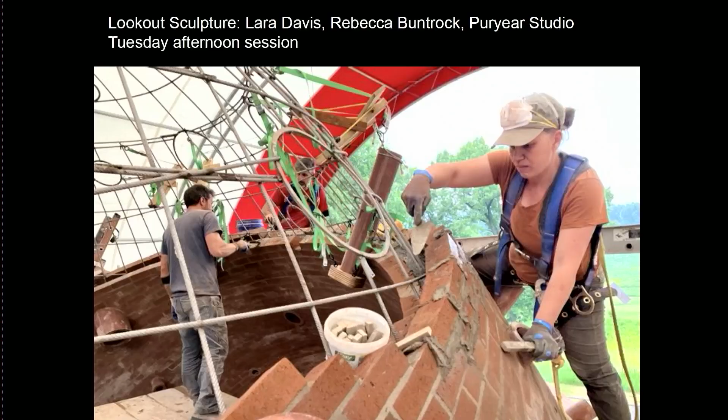And we've also done a few other things. We just recently built a sculpture with free-spanning brick around a guiding cage in the Hudson Valley at Storm King. Lara Davis will present that on Tuesday afternoon, so I won't say much more about it, but it was a really cool project, and we learned a lot from it.

And David Billington could never give a talk without showing Salginatobel Bridge. He was my professor, and Salginatobel is always there. My Salginatobel is, of course, this staircase by Guastavino, doubly curved, no steel. The builder, Rafael Guastavino Jr., dropped out of formal education at age 10.

The nerve of this guy to build this with no computer model, no nonlinear analysis, no dynamic analysis, and then to add insult to injury, this is in the civil engineering department at Carnegie Mellon. So you have generations of students going up and down the staircase without the foggiest idea how to calculate that it works, and it has no steel. This is 1914. Now, since we were together at MIT, I realized this staircase was proposed in 1914.

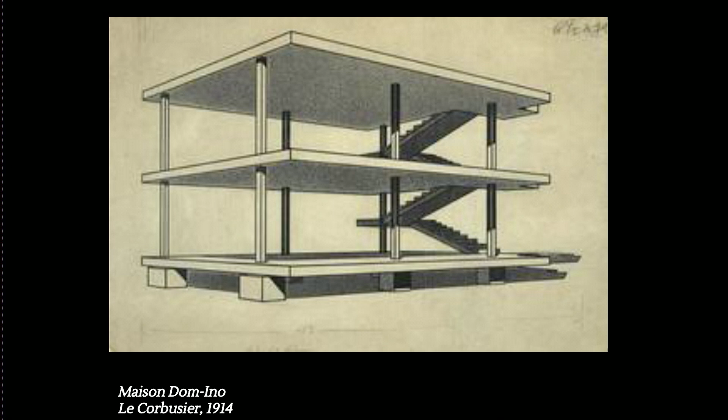The difference, this one was actually built. This one then became the only possible way to build for the next 110 years. And the only possible way to build a staircase is this. So I ask you, is this the pinnacle of all time? And 100 years from now, is this what the building code should say is the only way to build a staircase?

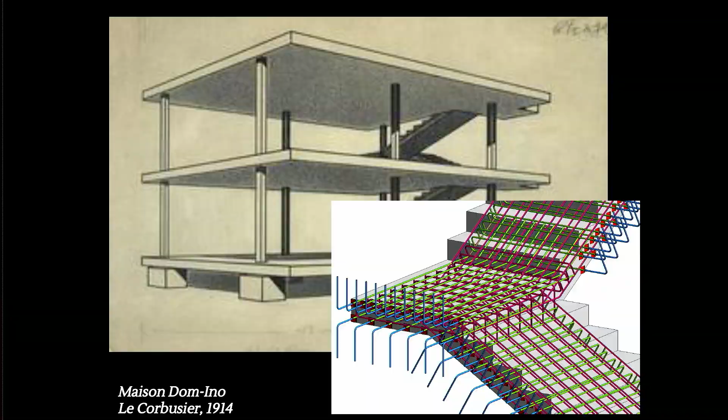And this recognition that we are following a culture, our building codes have culture, our system has ingrained ways of doing things, and we're at a time in the world where there's so many assumptions that we have to question when we look at the climate crisis, when we look at inequality, when we look at who benefits from our projects.

So I want you to think about what someone with a 5th grade formal education did here, and that was not mentioned in publications. It was not an important structure at the time, but of course, this was an important structure. So let's think about that. So one key message from 6 years ago and still today is beware of progress ideology.

John Ochsendorf remembers my undergraduate thesis with this Inca grass bridge in Peru. We were load testing the cables, and this bridge, I still believe, has more to teach us than the iron bridge at Coalbrookdale, which is always in historic structures. This bridge has been built by the same 4 communities for 700 years, speaking an indigenous language, and every year the bridge grows on the hillside, it falls into the river, and it's washed away by the river.

And when they build it, they drink a local beer that's made from the local corn. Find a more sustainable structure than that. 700 years, local beer, local grass. I know what you're all thinking, it's some really good grass.

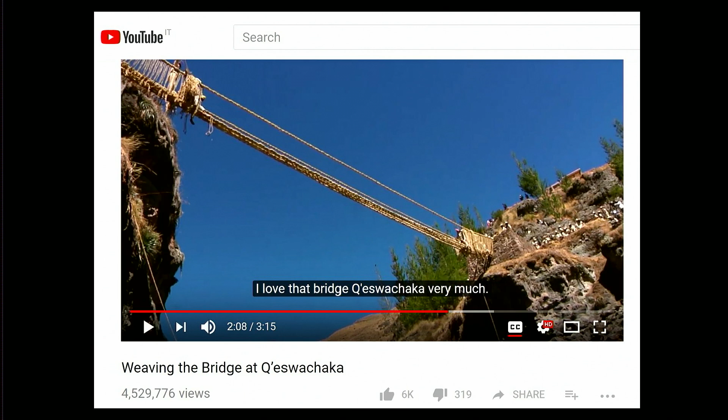So, for those of you who were with me in Kresge Auditorium 6 years ago, these were the 4 key conclusions: that we should study history. It's fertile ground for designers. If you're in music or literature or art or architecture, we're constantly learning from history. Structural engineering, structural design is not studying enough of our history.

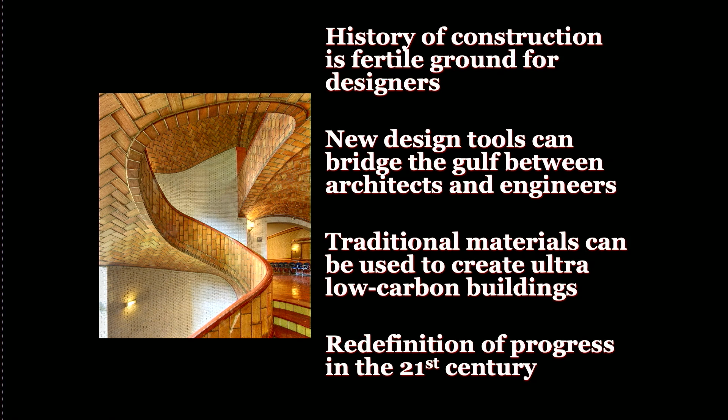We have new design tools that can help us bridge the gap, help design teams explore, and we need to really think about traditional materials to create ultra-low carbon buildings and perhaps redefine progress in the 21st century and not base it on that 1914 staircase filled with steel as the only possible way to build a staircase.

So the Swiss tradition of structural design is alive and well. It's known around the world, so it's especially nice to be here in Zurich. And boy, there are a lot of cool structures to look at. So things are looking up here. But many of us were influenced by Billington's work on the Swiss legacy in an art exhibition that highlighted the work of Heinz Isler, of course, as the great shell builder, but also Maillart, Menn, and Othmar Ammann.

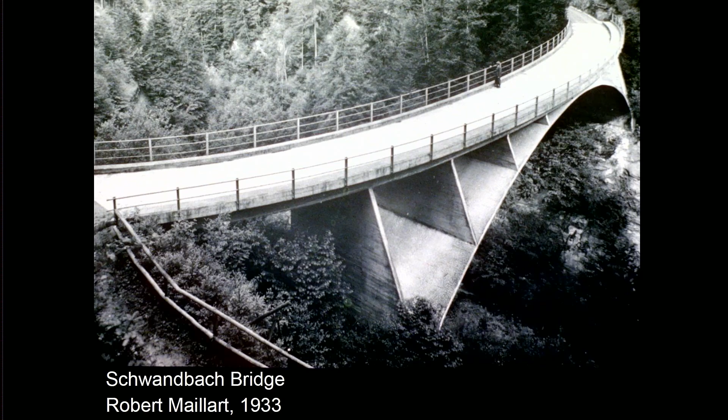And Maillart, of course, is super well known as this great disciplined and playful designer. Here he is allowing the ash to go as far as possible without falling off. So he's got to hold very, very still. So it's a playful moment, but it's also quite disciplined, what you need to be a designer. And of course, some of you and the students in the audience especially know Salginatobel. You may know the Schwandbach Bridge with this incredibly curved, thin deck, well known around the world.

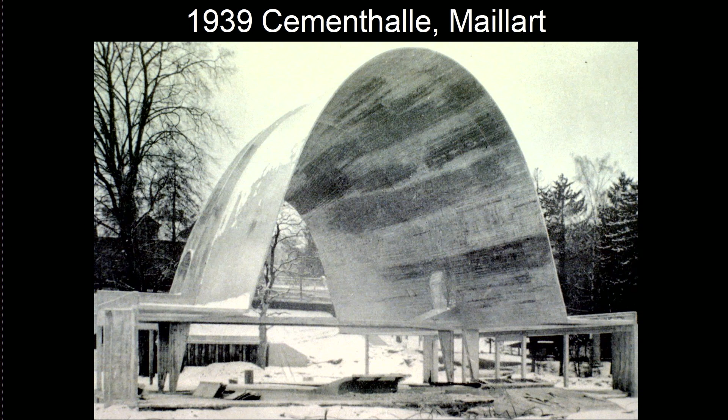I can't help but also add on the 85th anniversary, the 1939 cement hall of a mature Maillart, to give you an idea of how far ahead he was in thinking about surfaces and what was possible in shells. This is built in Zurich as a pavilion. The shell is 6 centimeters thick, not very much published at the time, kind of unremarkable in the press. And look at the cleverness of the formwork. It was gunnited onto the shell.

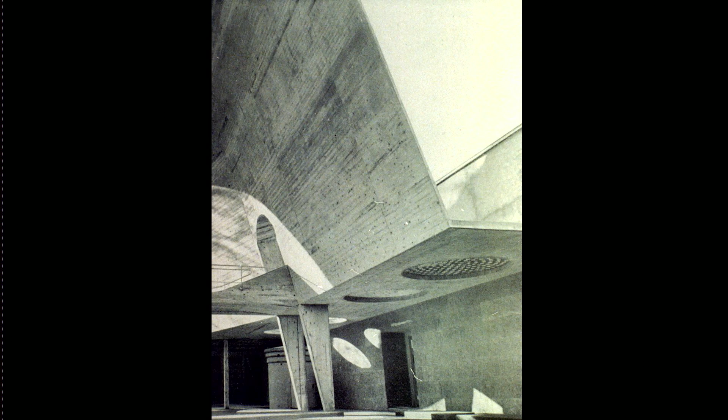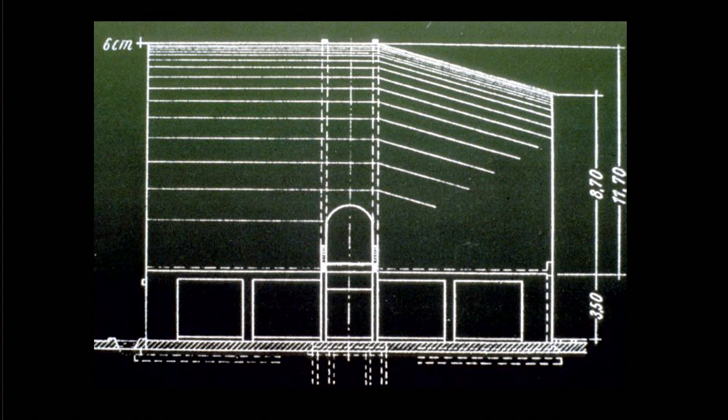And also look at all of the elements that are integrated here. You have shaping according to where you need greater bending. You have lightening of the slab and allowing in natural light. And just a radical, radical way of combining different elements. So if someone were presenting this project at this year's IASS, we would say, wow, that's a pretty impressive shell. Oh, and he calculated this on about 1 sheet of paper. So this is what it looks like in section, with adding some parabolas, of course, but then changing curvature a bit to stiffen it.

And the way he conceived of it was essentially as a deep beam inclined. Calculate that very easily on one sheet of paper. It's supporting a series of arches and then cantilevers coming off of that. So radical structure in a synthetic way by a brilliant designer at the end of his life. This gives you a better sense of the geometry.

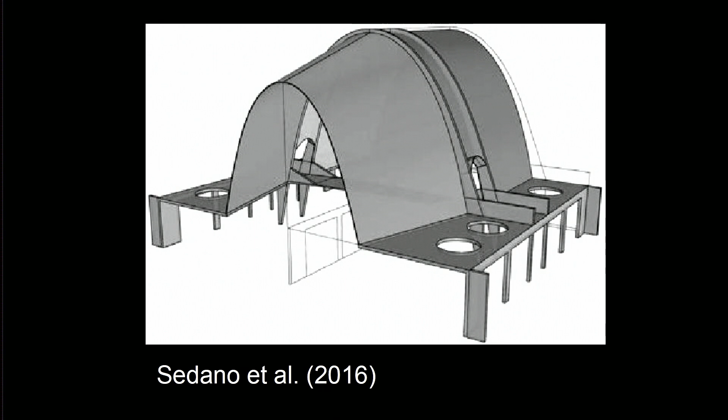So I pay homage to this shell here in Zurich because it was so important for our field. And here he is in the center as they're trying to bring down the temporary shell with dynamite. Of course, you all know what happens. They put the dynamite, they blast it, and the shell stands. And they do it again and it stands. So they eventually have to pull it with a bulldozer to bring down the shell. Incredible strength through geometry, 6 centimeters thick.

And here he is, just a year or two before he dies, picking through the rubble, studying, being a student until the end, and thinking about what he can learn from this integrated design. And he's absolutely projecting into the future what could be done with shells. But again, wasn't paid much attention to at the time.

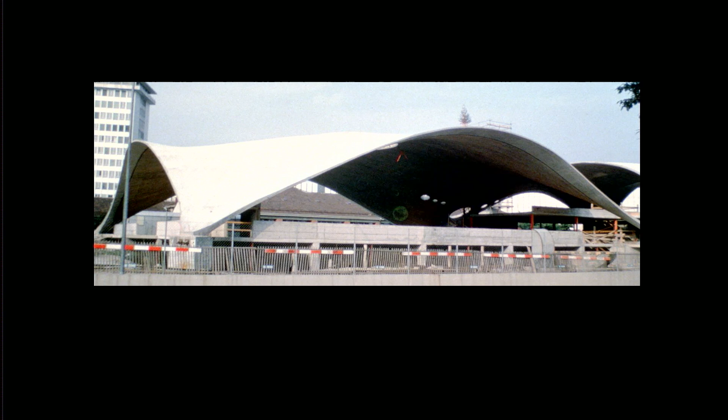Of course, Isler goes on to do remarkable things with hanging geometries that are compression only. If you have a chance to go and see the Sicli building in Geneva, it has the Candela exhibition now, which is super exciting. So I hope some of you are able to go and see that. And this is an image from Billington, which shows Isler standing on Sicli and pointing to the unlimited future of shells.

We're all on the same page?

Good. But I also have to pay homage here at ETH to something that inspired so many of us, and that is form finding and exploration of geometry through graphic statics. And we're delighted to see all of the renaissance of graphic statics happening around the world, and a lot of it being led here at ETH as well. But we pay homage to these professors, and this important work you can constantly continue to learn from.

But I also want to highlight Maurice Koechlin, one of the students. We've recently been digging into some of his work, and of course, many of you know that this is Koechlin's original drawing of a tower or a pylon that would have no force in the diagonals. So there's a very subtle message here, which is that the Eiffel Tower is actually Swiss.

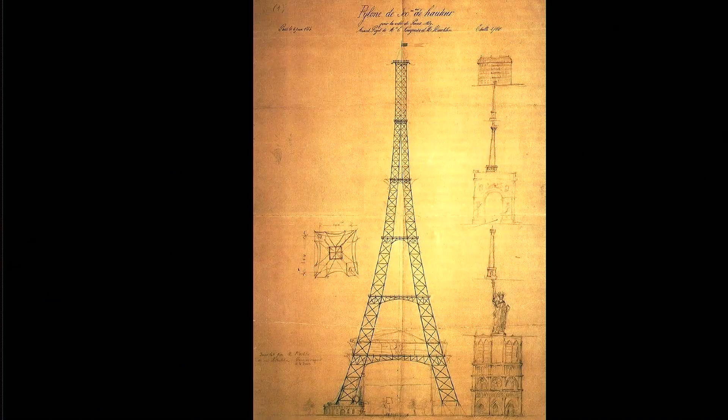And with all due respect to our French colleagues, the other key thing, of course, we've recently been digging into archives and the design process of one of the greatest bridges, the Garabit Viaduct, which Maurice Koechlin also designed using graphic statics that he learned here at ETH. And we've got some exciting new results on that we're going to present at next year's IASS.

So I'm not going to go into a lot of detail, but I do have a very serious message for all the students, which is you must go and visit great structures and learn from them. Study them, climb on them. You can learn so much from visiting built buildings.

Don't you think, Philippe? 20 years ago this summer, we made a pilgrimage to Garabit Viaduct. We're still learning from it. That was back when I had so much hair.

And so here in Zurich, I pay homage to the Swiss legacy that Billington writes about in The Tower and the Bridge. We could quibble with some things in it, but a lot of it still holds and holds well. And for those of you who didn't have a chance to hear Billington lecture, he always spoke about the 3 E's of structural design, in particular efficiency, economy, and elegance.

And the idea is just so simple. We obviously must build efficient structures from a material standpoint, but they must be economical to build, or else they're wasting those natural resources. And ultimately, as Maillart said, we are seeking to avoid ugliness. So within those constraints of efficiency and economy, we're trying to find elegant solutions.

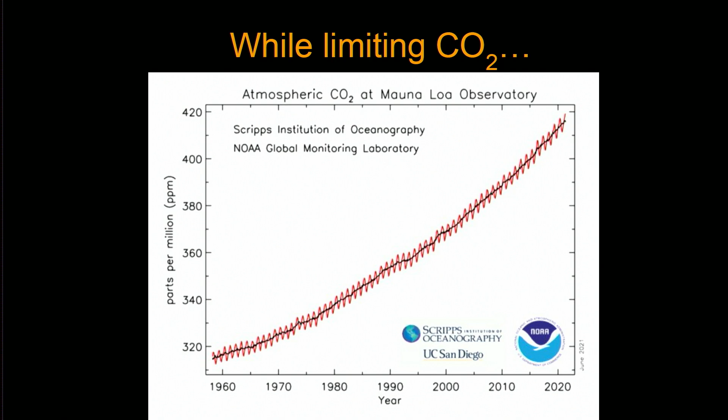We need IASS. We need new ideas. They need to work with all those constraints of economy and efficiency, but they also have to really think carefully about context and environment. And in particular, with all due respect to Switzerland and Canada and the UK, wealthy countries with lots of water are probably going to be okay. Most of the floor area that's being built is in Africa, India, Latin America. If you look at existing floor area and what is projected to be built, most of it is going to be built not necessarily in Switzerland or Canada.

And if we ask ourselves, how can we most easily avoid a ton of carbon emissions, we may have better opportunities collaborating with colleagues all around the world. And so it's so great that IASS is so global, but I'd like to really shine a light on where the needs are to not import steel and cement and build inefficient structures. And then if we can win in the marketplace, we can have a really big impact here.

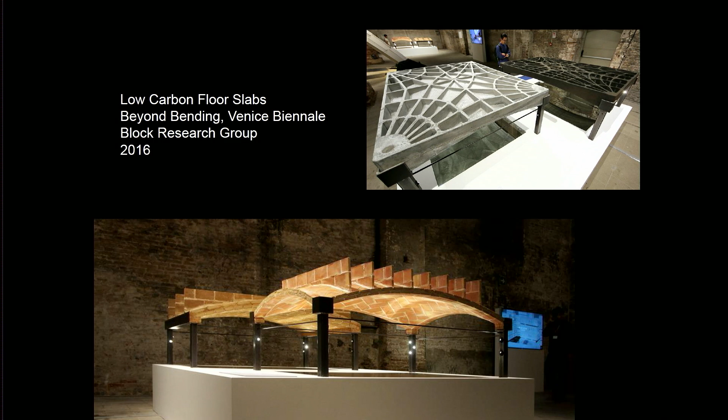And of course, some of our work on low carbon floor slabs, these 2 digitally fabricated here from BRG, and my rather ancient methods of Guastavino tile construction, an Islamic construction method from more than 1,000 years ago, unreinforced shells, doubly curved floor systems. We were saying this 8 years ago that this is important, and I want to highlight another paper we'll have tomorrow. Nebu is presenting on some low-carbon vaulted floors, and we'll be building a prototype in Ethiopia next year.

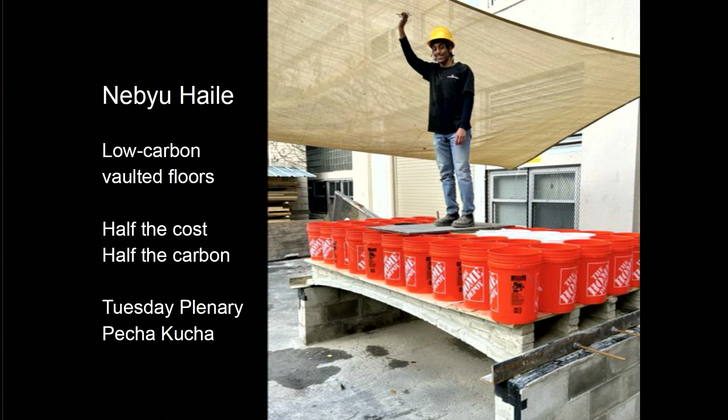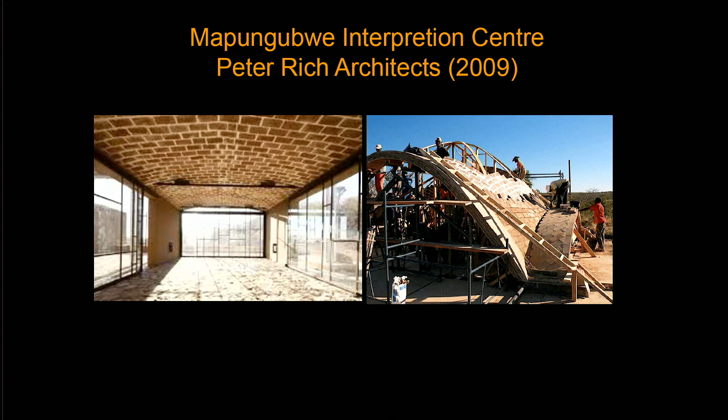And these are about half the cost and half the carbon of existing concrete slabs in low-cost housing in Ethiopia. So we're working with builders to see, can we create projects that are going to win in the marketplace, and then the low carbon just becomes a bonus. And of course, the Mapungubwe project, this is lost formwork for a concrete slab on the left, but we think there are constantly things we can learn. So we're still on the same bandwagon 15 years later. Unreinforced shells with low strength, these are about 1 megapascal shells that have the potential to build low-cost structures.

I also want to remind everyone, for those of you who were here in Venice in 2007, I distinctly remember the great structural designer Jörg Schlaich got extremely upset about this structure at an IASS conference. Does anyone else remember that? You remember, good. I'm not the only person here who remembers that. He was really upset about the lack of efficiency, the wastage of materials, and that had a big influence on me as a young professor. And so that was one of the ideas I said to Catherine maybe more than a decade ago, and then I got out of her way. And so I again pay homage to Schlaich and him demanding a higher moral and ethical responsibility from design teams with this colossal structure as an example, not to be followed.

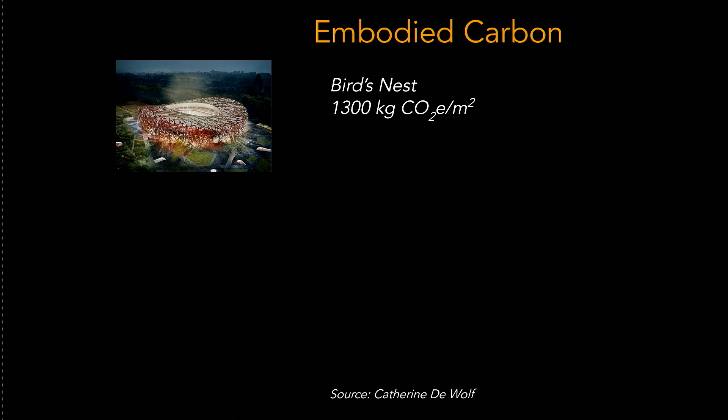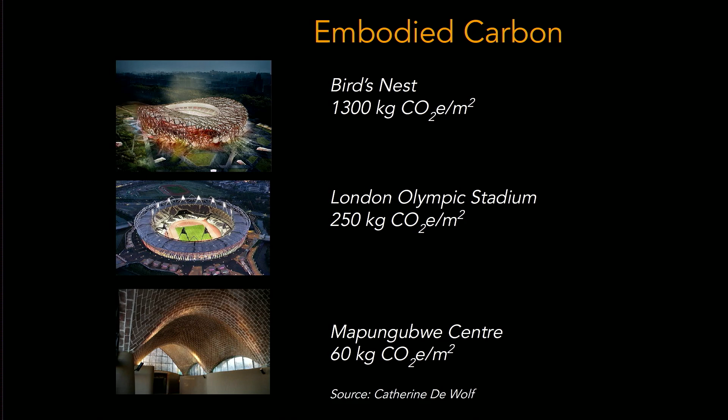So Catherine quantified over a ton of CO2 per square meter. The London Olympic Stadium, 4 years later, is 1/5 of that per square meter. So you can build about 5 London Olympic stadiums for 1 Bird's Nest. And then the Mapungubwe is a factor of 4 again below. So with local materials, unreinforced, you can go dramatically lower carbon. And so this was work we published about a decade ago.

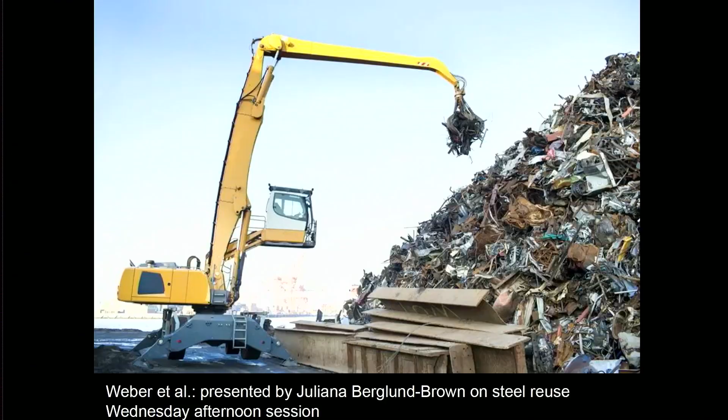But this also raises a question about the lifetime of our structures and really thinking about many of our structures almost like disposable food containers that have short lifetimes, and we need to really think about minimizing them. And if you look at a typical metal scrap heap, you might find steel beams like this at the edge that are holding the mountain of steel scrap in place.

Well, I have a crazy idea. Actually, Juliana and many of you here have this idea, not just me, that these steel beams could do more than just retain that scrap. We could use them in new projects. And we need to change our supply chain to acknowledge that when buildings come down, we should mine those resources and use them in new projects. And I know a lot of you are here working on those topics, but for me, that's super exciting. And we'll present some work that has implications for steel reuse on Wednesday afternoon.

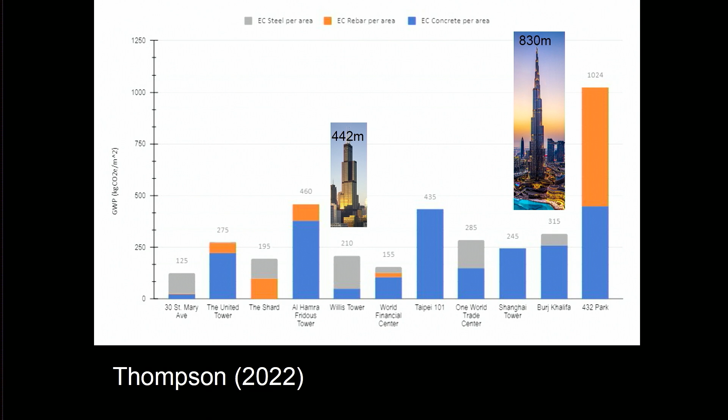Now, here are the material quantities in terms of global warming potential, kilograms of CO2. On the far right is 432 Park, that concrete building. These are other tall buildings around the world. 432 Park is 425 meters tall. The artist formerly known as the Sears Tower, the Willis Tower, is around the same order of magnitude. It's 1/5 the carbon. The Burj Khalifa, 1/3 of the carbon and twice the height. Shocking. Absolutely shocking.

And yet, these projects are built with huge amounts of material because there's a design team who said this is a good idea, or I'm happy to take my paycheck for this project. So I'll add a fifth: ethics. What are we doing as designers? What projects are we working on? All our fancy education, our dynamic analysis, who benefits from our work?

And why? So I know I live in my ivory tower in the university. I seem to be just creating other professors; there are a lot of us. But we have an obligation to talk about this, to talk about ethics. And so I'll ask a few basic questions. Should the project be built at all?

Who benefits from this project being built? And should I personally work on this project? Because I do think we as a community can start to take a stand that there are certain projects, as Schlaich reminded us in 2007 in Venice, that the bird's nest was a disaster. And he would not have worked on that project. Or he would have tried to make it a lot better and then may have walked away.

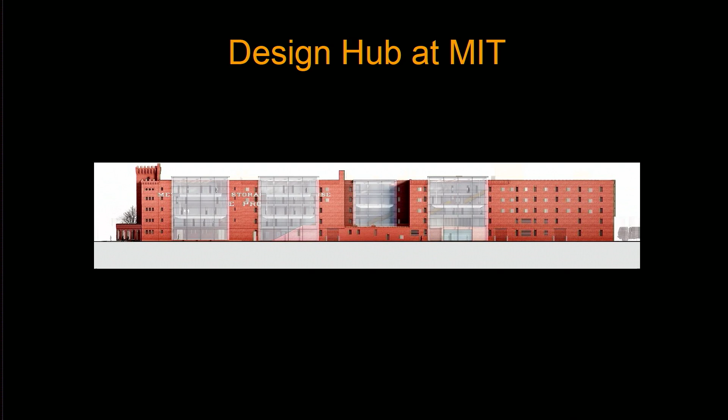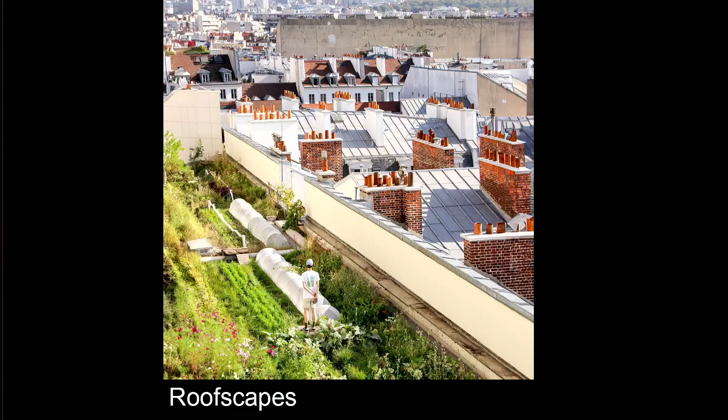And so the main thing I'm working on right now is trying to change undergraduate engineering education at MIT to have much more open-ended design. So we're doing an adaptive reuse of a large brick warehouse. And these are going to be design studios with hands-on making projects, bringing teams together to work on pressing challenges with collaborators from around the world. And our hope is that we're going to be able to change what an engineering education looks like to have much more creative hands-on. I also want to highlight our students going out into the world and taking ideas.

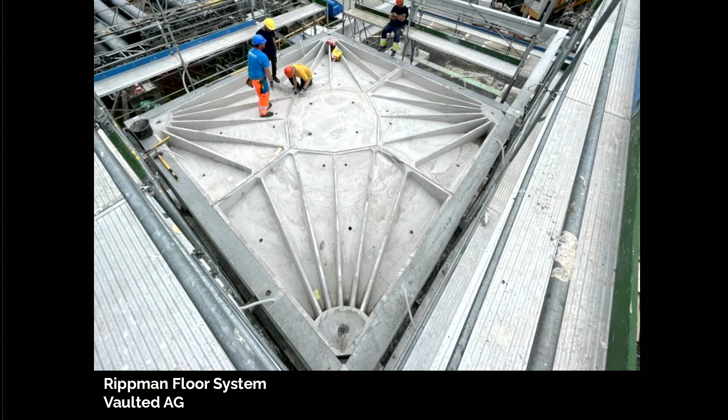So if you come from Paris and you're concerned about urban heat island effect, don't wring your hands, create a startup. And Roofscapes is now making real change in Paris, so that's very exciting. Or build some low carbon floor systems that can compete in the market.